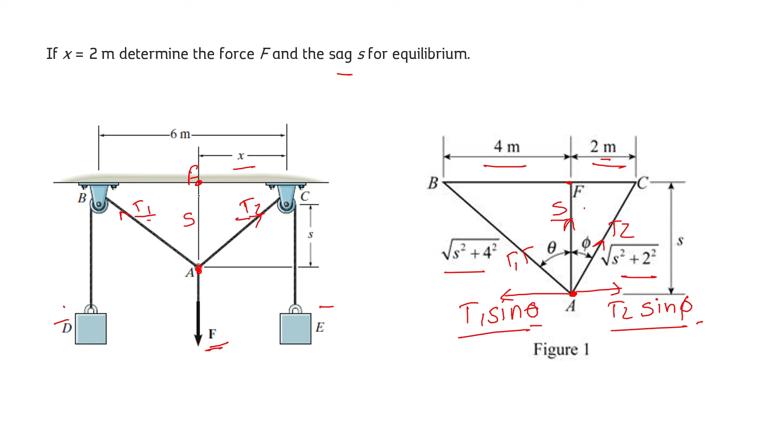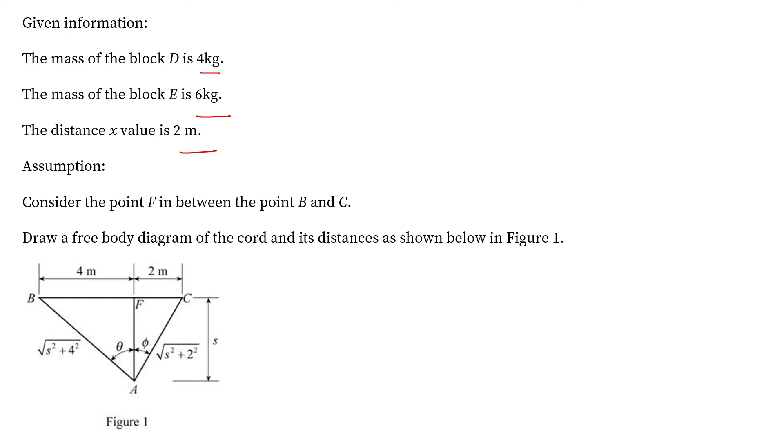So let's move forward. As per the given data, the mass of block D is 4 kg, the mass of block E is 6 kg, and the distance x is 2 meter. As we discussed earlier, we have drawn the free body diagram and we can show the hypotenuse. So we can write sine theta equal to 4 meter divided by under root of S square plus 4 square, while sine phi is the opposite side, 2 meter, divided by the hypotenuse, which is the length of AC, under root of S square plus 2 square.

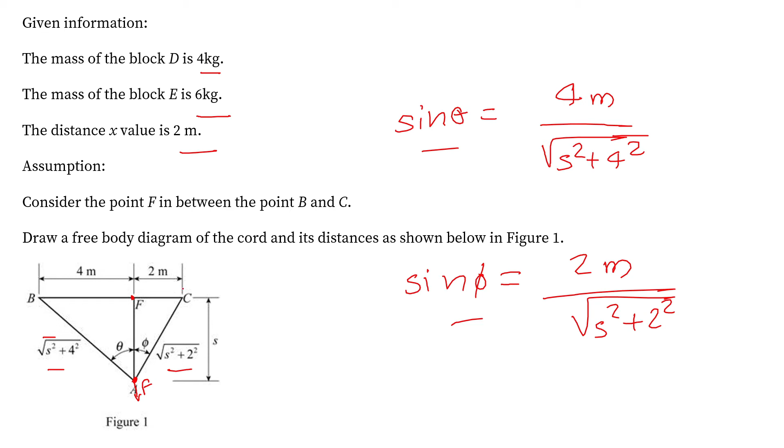So using simple geometry, we can find a relation between theta and phi. From there we can find the value of theta and phi, and then the value of force F, which is acting in downward direction at point A. So first of all, let's consider the point F here in between segment B and C. So this is the free body diagram. Let's name it as figure 1. Now let's move forward. Let's go to point A.

What's happening there? The tension in cable AB and the tension in cable AC are given. We'll name them force AB and force AC, and the downward force is force F. So all three forces are in equilibrium. We can write the length of cable AB: this is cable AB, this is cable BF, and this is cable AF. So the length of cable AB is equal to under root of L square BF plus L square AF. As this is 4 and this is S, L AB equals under root of 4 square plus S square. We'll name it as equation number 1.

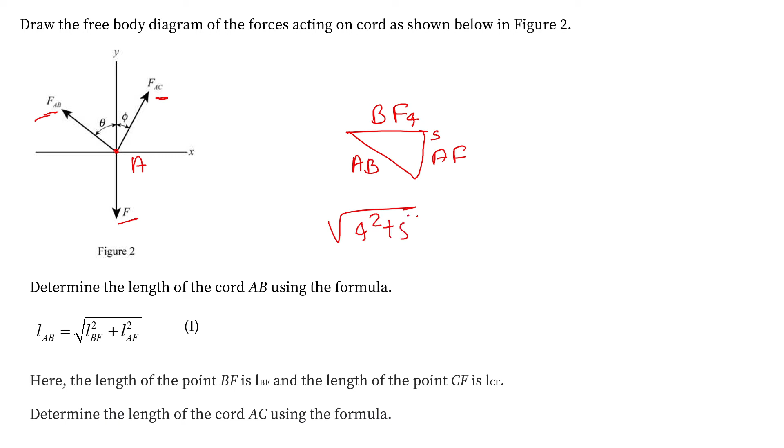Now let's move forward. We can write the length of AC also using the same formula, where the length of AF is S, and this length is given to us, which is the value of X, that is 2 meter. So from here we can easily find the length of AC.

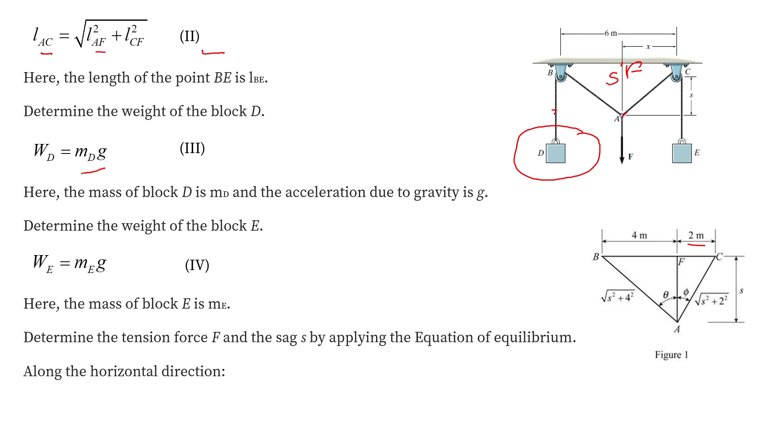We'll name it as equation number 2. Now let's try and understand what would be the force, or we can say the tension in cable BD. Here, as we know, the tension in cable BD would be equal to the weight of block D, where weight of block D can be written as mass of block D into acceleration due to gravity, which is g. We'll name it as equation number 3. And same for weight of block E, as we can see here.

Now, as we know, the tension in the cables would be equal to the weight of block D and weight of block E. So here we'll consider it as weight of block D, while here we will consider it as weight of block E. So first we will find their X components. The X component of weight of block D would be in this direction. WE can be written as WE into sine phi, and WD can be written as WD into sine theta. So from here we can find the component.

Now as we know, there are only two forces and they must be in equilibrium in order to maintain the equilibrium of the system. So we can equate them. We'll name it as equation number 5. Now at point A, we are going to consider the horizontal forces and also the vertical forces. In order to maintain the equilibrium in vertical direction, the summation of all forces in vertical direction would be equal to 0, where we can write summation of Fy equal to 0.

So from here we have the component of weight of block E in upward direction, the component of WD in upward direction, minus the force F in downward direction. We can name it as equation number 6. Now let's substitute the value of AF and BF in equation number 1 and find the length of AB. That comes out to be LAB equal to under root of 16 plus S square.

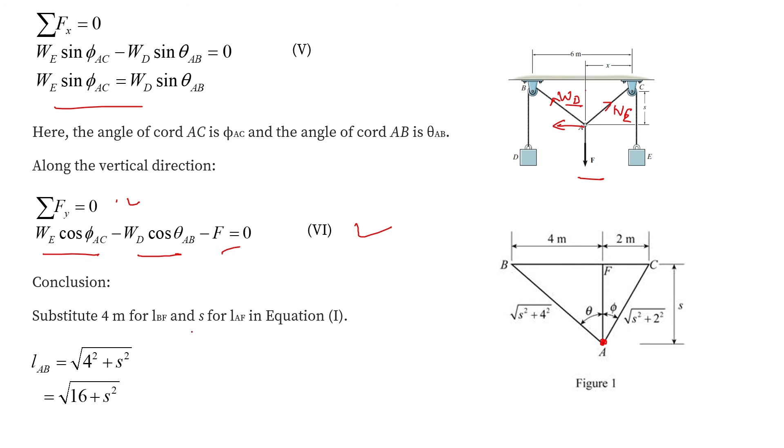Now let's find the length of AC, where we can write this as S and this is given to us, which is 2 meter. So the length of AC would be under root of S square plus 4. Now let's first find the tension in this cable, which would be equal to the weight of block D, mass of block D into acceleration due to gravity. Here we are considering the value of g as 9.81 meter per second square. The weight of block D comes out to be 39.24 Newton.

Now as we know the value of weight of block D, let's find the weight of block E. The weight of block E will be equal to mass of block E into the acceleration due to gravity, which is 9.81 meter per second square. That comes out to be 58.86 Newton.

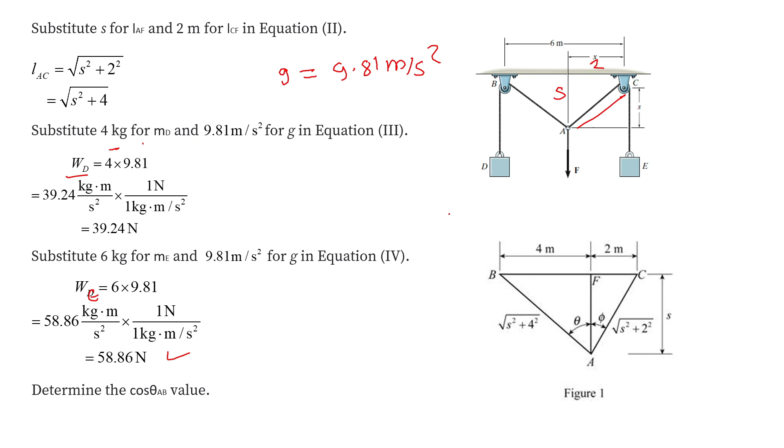Now, first of all, let's determine the value of cos theta and cos phi. We can write cos theta as the length of AF divided by the length of BA. So cos theta is S divided by under root of 16 plus S square, while cos phi can be written as length of AF, which is S, divided by length of AC. So it is S divided by under root of S square plus 4.

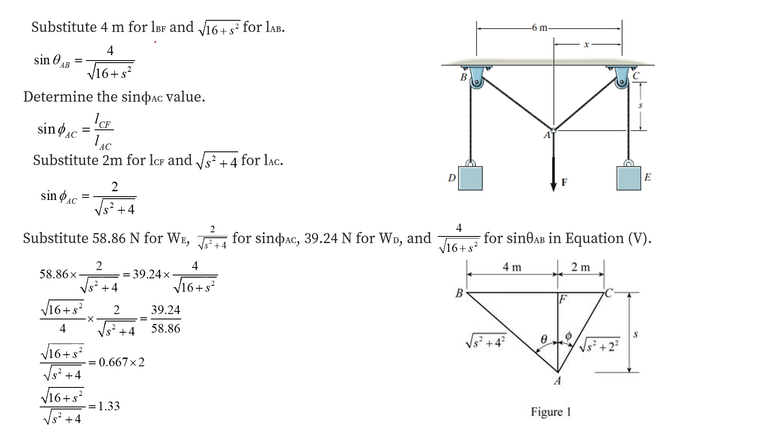Now let's find the value of sine theta and sine phi, where sine theta can be written as opposite side, length of BF, divided by the length of BA. So sine theta is 4 divided by under root of 16 plus S square. Now let's find the value of sine phi. This is the angle phi and this is the angle theta. So sine phi is opposite side, which is 2 meter, divided by hypotenuse, which is under root of S square plus 4.

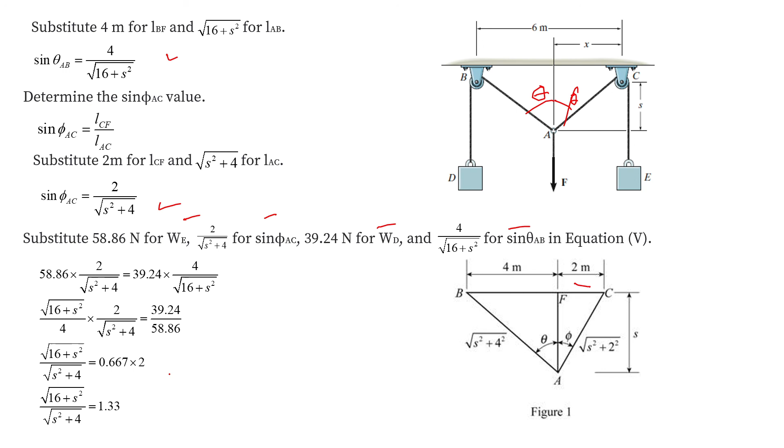Now as we discussed, we'll substitute the value of WE, sine phi, WD and sine theta in equation number 5. As we substitute the values, we can find a relation for S. So from here we can find the value of S, 3.4 meter.

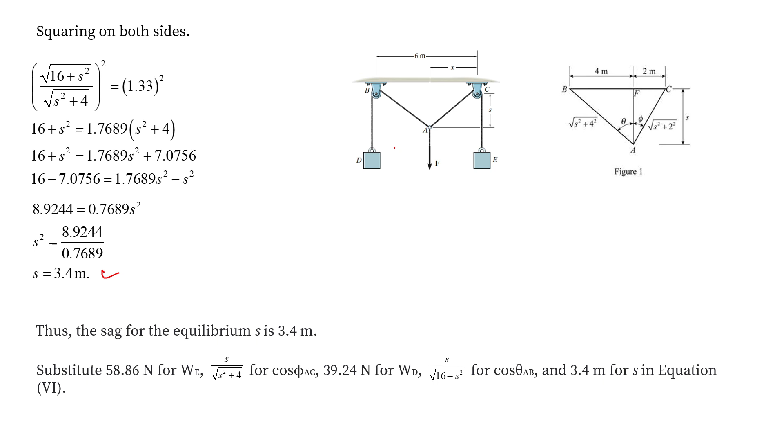Now, as we know the value of S, we'll substitute the value of S in cos phi and cos theta and find the value of F. As we substitute the value of S, WE and WD, the value of F comes out to be 76.0 Newton. So for the condition that x equal to 2 meter, we have found S, that is 3.4 meter, and the force F required to maintain the equilibrium, that is 76.0 Newton.